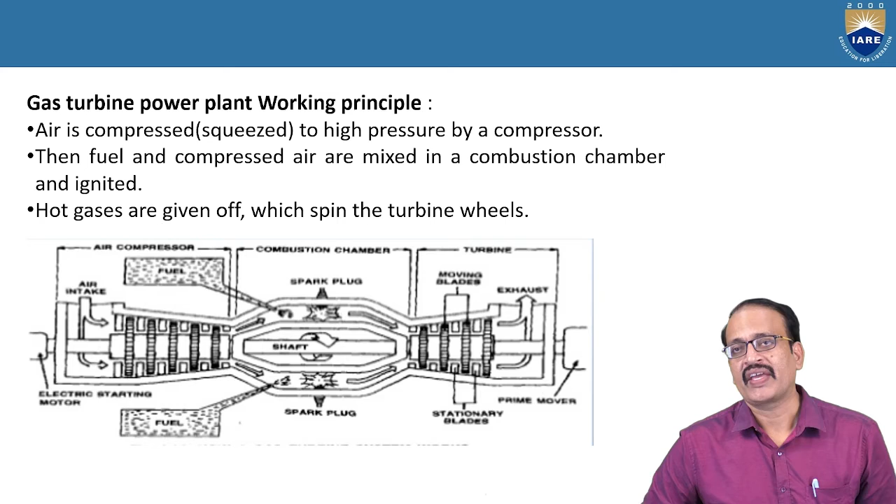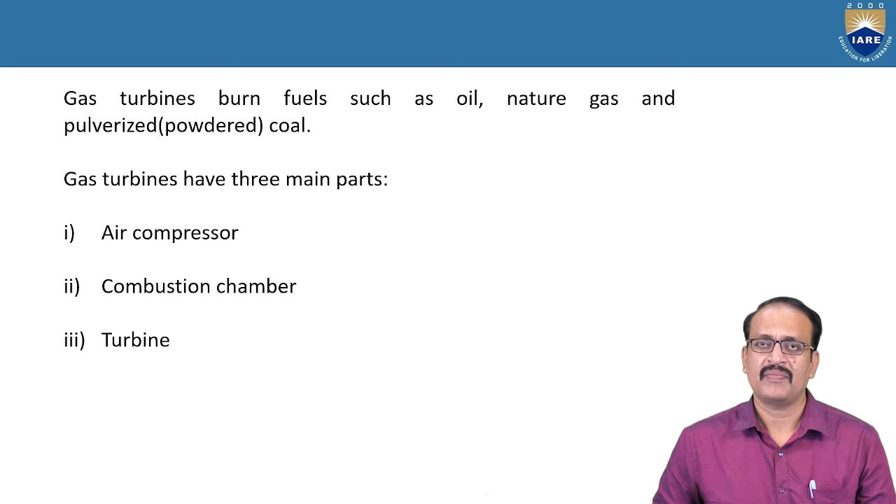After compression, the compressed air moves into the chamber. There we supply fuel and burn it, and high pressure gases are released because of that burning, and they move. While moving, they have so much kinetic energy. They rotate the turbine and then go away through the exhaust. So the main parts are the air compressor, combustion chamber, and the turbine.

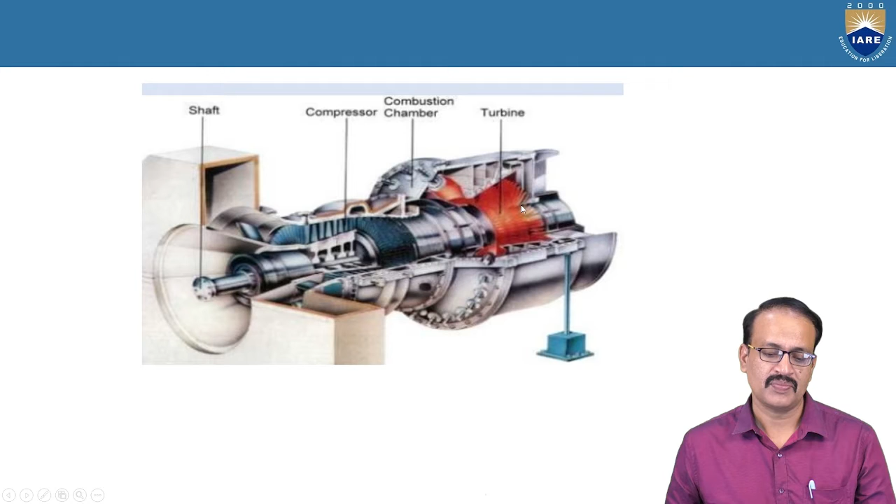You can observe here, there is a shaft - the compressor, combustion chamber, and turbine. So the duty of the air compressor is to suck the air and send the compressed air into the combustion chamber. For that, we use the motor for rotating that compressor.

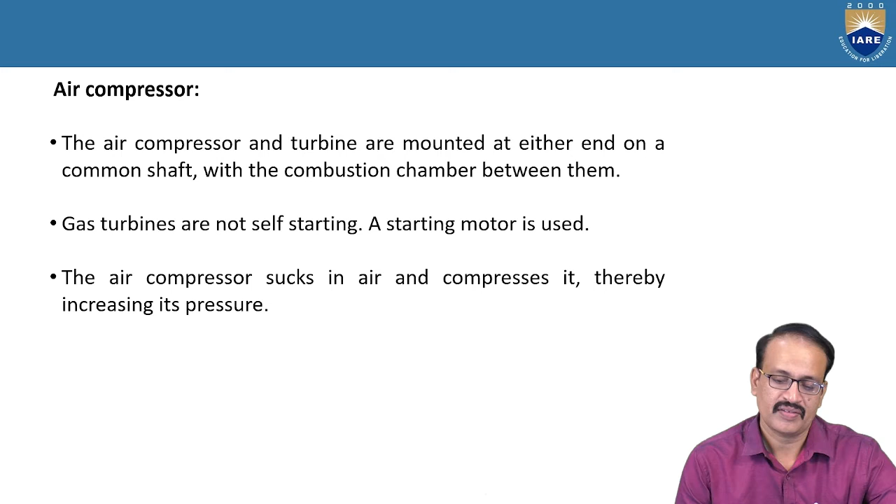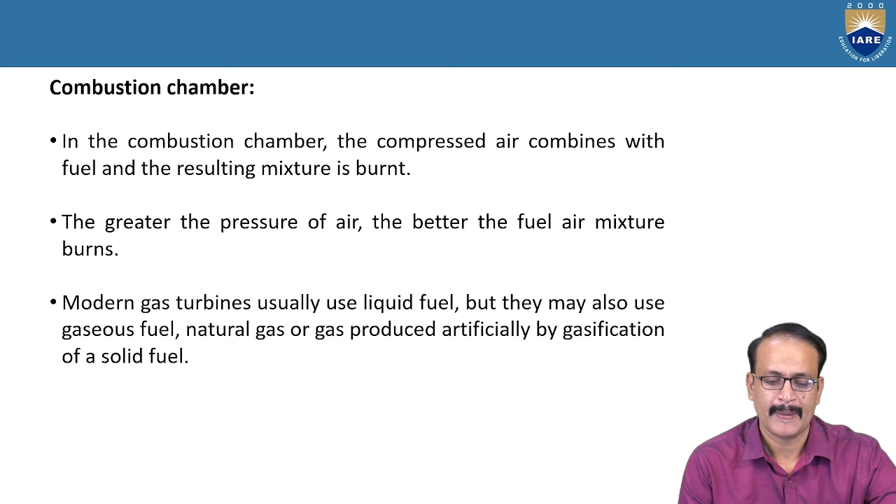So what happens in the combustion chamber? The compressed air mixes with the fuel and we burn it. So much of gases are released with high velocity because of that burning. Next is the turbine, a multi-stage turbine, where we can properly use the velocity of those gases.

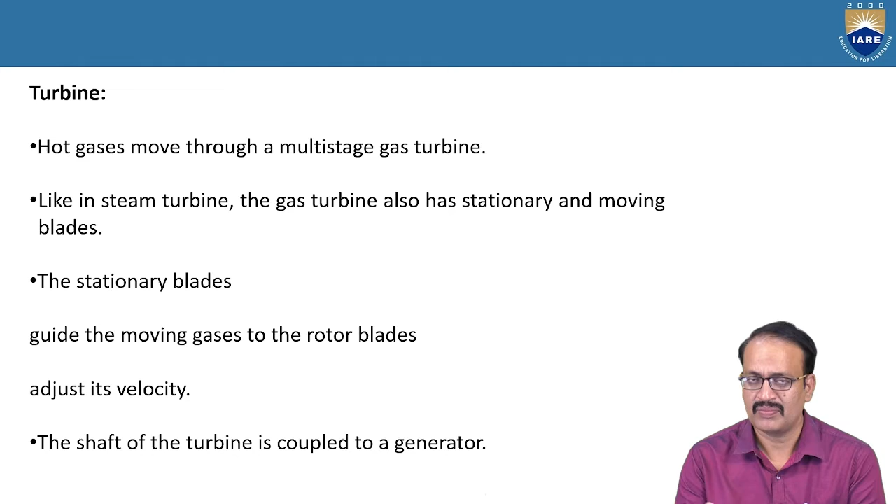It will have blades, rotor and shaft, which is going to couple with the generator. Normally the turbine will be coupled with the generator.

So what are the applications? We can use them to drive pumps. Majority we are using the gas turbines - in fact, the gas turbines we use for power generation is less compared to the gas turbines used for aircrafts, for moving aeroplanes and ships, and also we use them in high speed cars.

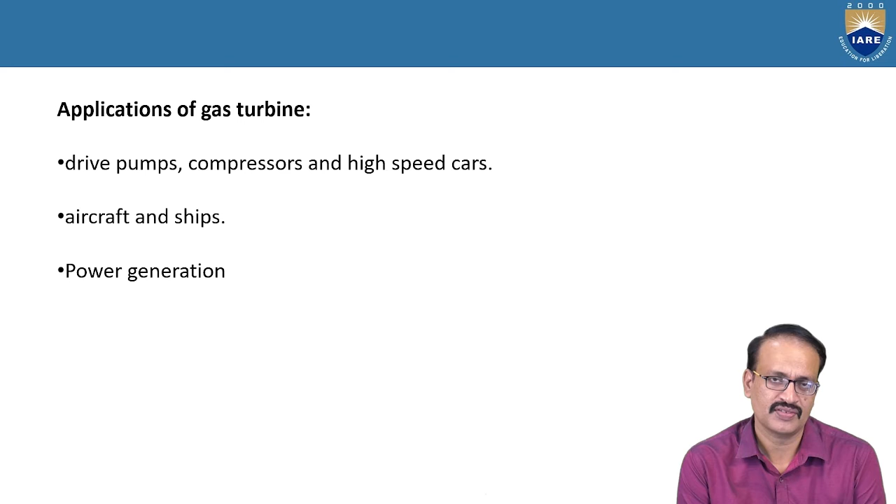So this gas turbine is a very simple thing, and also it is very robust. It is also cheap - the construction and installation cost is very less. So it has its own advantages, so many advantages.

And if you see the advantages, because it is simple, the operation is also simple, and the construction is also simple. So it is cheap, the manufacturing is cheap. Since the operation is simple, the maintenance cost is less. And also here there is no need for storage of fuel. And there is no need for boiler, condenser, other accessories as for the steam turbines - those things are not needed here.

So the installation cost is very less. So we can use cheap fuels like kerosene, powdered coal, benzene, paraffin - we can use cheaper fuels than petrol and diesel here.

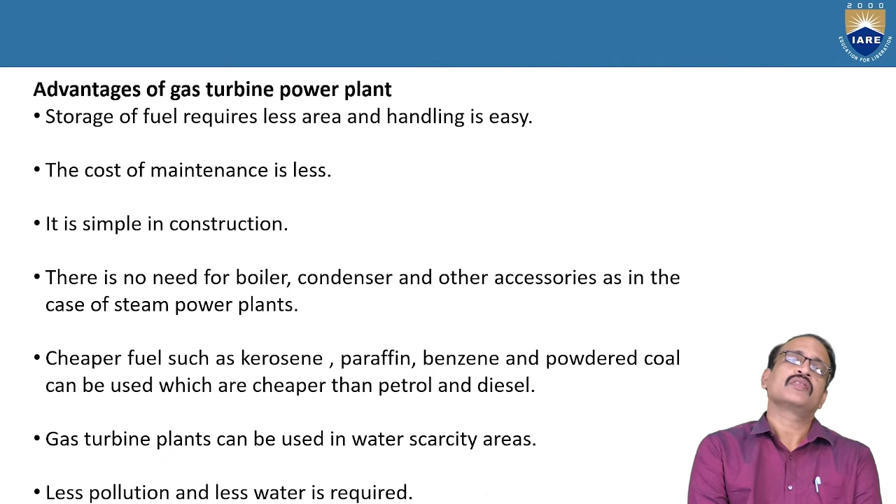So whenever, if I go to the desert, if I go to the Arab countries where water is more valuable than oil, I cannot construct a hydro plant. Even a thermal plant needs so much water for converting it into steam, for condensing, for cooling. So in such places, where there is scarcity of water, I can go for this gas turbine. And also the pollution is less.

Here the pollution is very, very less. If you compare with the steam turbines, so much of ash pollution is coming. So that problem is not there.

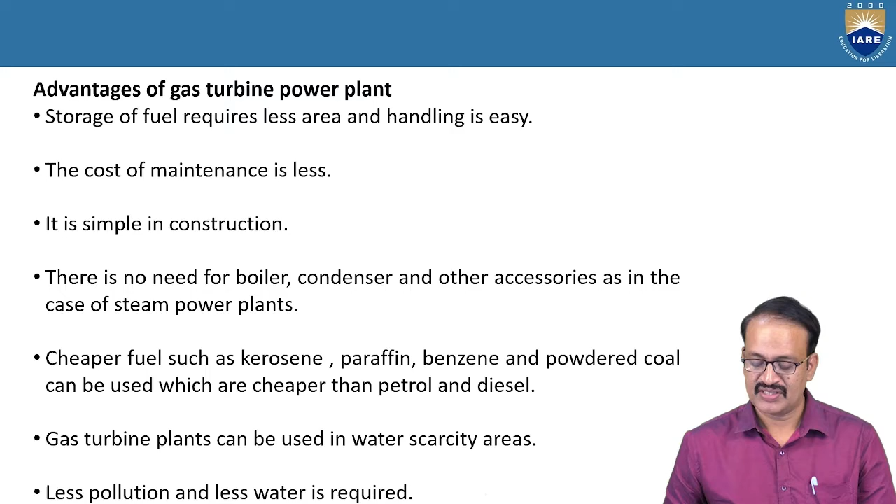But similarly, for anything we'll have disadvantages also. So the disadvantage is that, as I told you earlier, 66% of the power which is generated is used for the motor to drive the compressor. So that is the major disadvantage. So the efficiency is only up to 30%.

And also it rotates with very high speed, 40,000 to 1 lakh RPM, rotations per minute. You can imagine what the speed is - if you compare with the hydro plant, hydraulic turbines, steam turbines, there is no matching at all. And the temperature also is very high, 1100 to 12,600 degrees centigrade, so normal metals will melt, normal metals cannot withstand it. So the design has to withstand that speed, the mechanical stress, and the heat. So you require special alloys, super alloys, and a high technology for that.

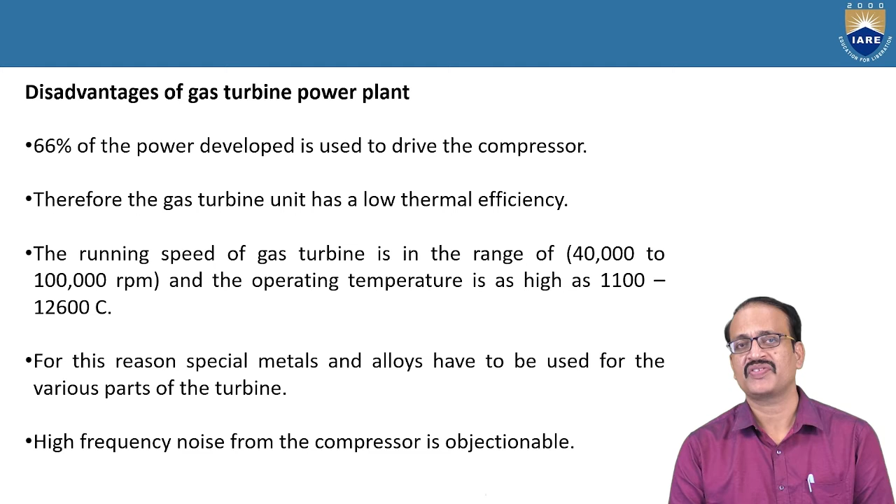So that's about the gas turbine, but we will compare. If you see, there is no matching if you compare the efficiency, if you compare the speed, if you compare the temperatures - that much speed it is going to rotate, that much high temperature it is going to operate, but the efficiency is less. But the advantage is that the installation cost and area required is less, no need for boilers, condensers, cooling towers, all these things.

Okay, we will see a small comparison here. So we know that gas turbines are mainly used in aeroplanes, technically we can say aviation. So in both cases we are going to use the gas turbines.

So in aviation, the main aim is that we have to produce thrust, and in land gas turbines, meaning the turbines we use to generate power, the main thing is it has to produce more mechanical energy. Here the requirement is mechanical energy, there the requirement is thrust force. And the end component for aviation is the nozzle.

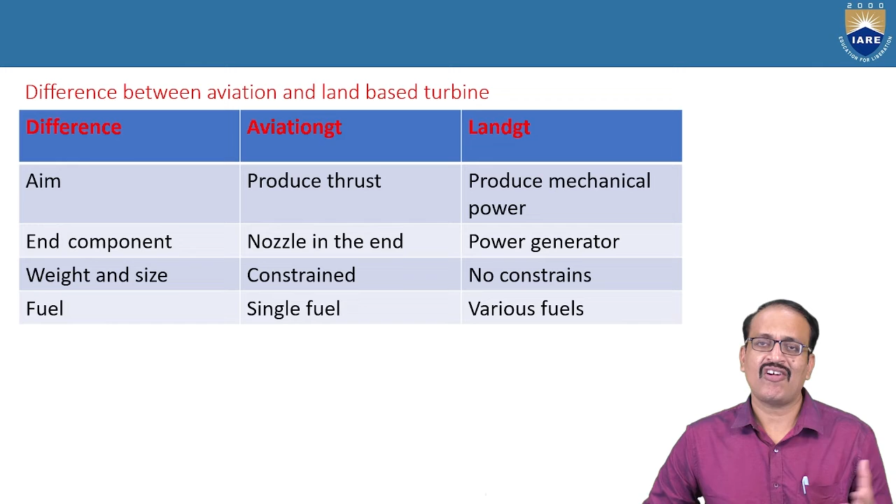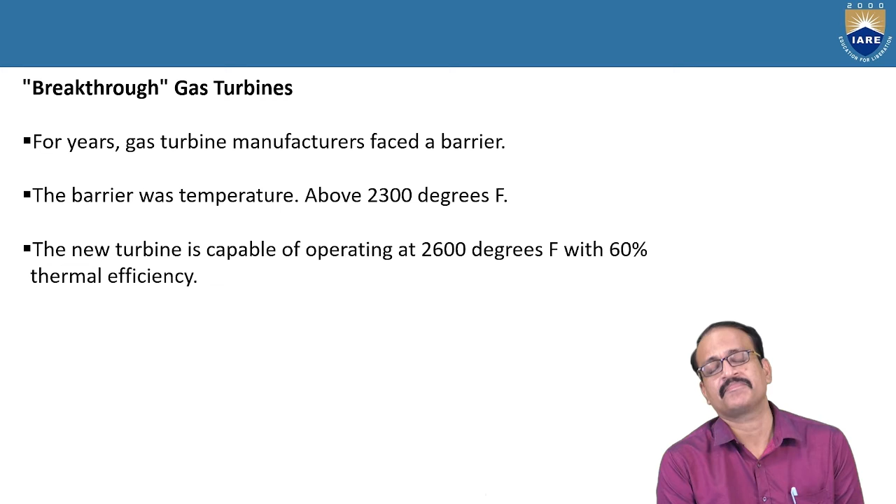And as I told, there was a breakthrough in the year 2000. They were able to make a gas turbine which can withstand high temperature, from 2300 degrees Fahrenheit to 2600 degrees Fahrenheit, with 60% thermal efficiency. So that is a good breakthrough which has happened.

And we were always comparing - yes, we have to compare. Since there also we are using thermal energy, here also we are using thermal energy, so we need to compare this gas turbine with the steam turbine. The gas turbine is not going to depend on water availability. But if you go to the steam turbine, yes, it requires so much water, because the water is what we are going to use as the force - we are going to convert it into steam.

So for the gas turbine, the space for installation is less, and for the steam turbine, the space for installation is high. The efficiency of the gas turbine is less, the cost is also less, installation cost is also less, maintenance cost is also less, but the efficiency is also less. But for the steam turbine, the efficiency is high.

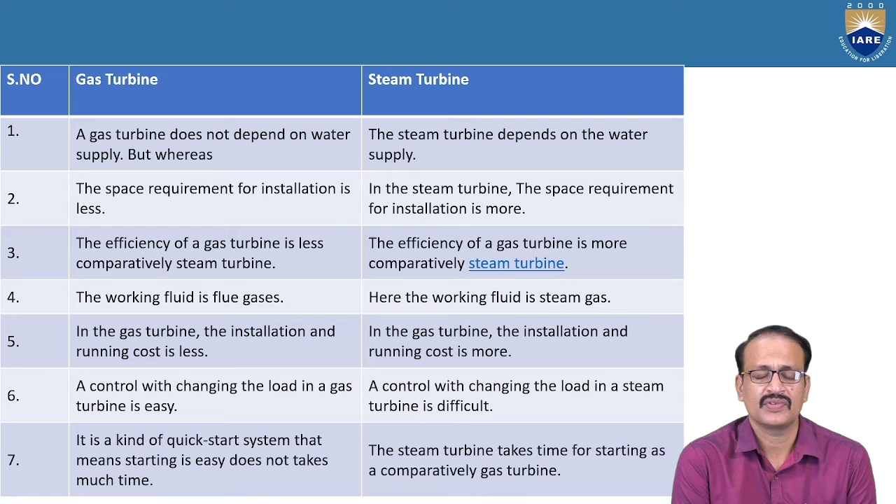If you want, it is possible in the gas turbines, but it is not possible with that much speed in the steam turbines. It is not possible in the steam turbines.

So that's why we can say the gas turbine we can use in areas where the fuel is cheap and readily available, and the land is less and water sources are less. In such cases, you can go for a gas turbine.

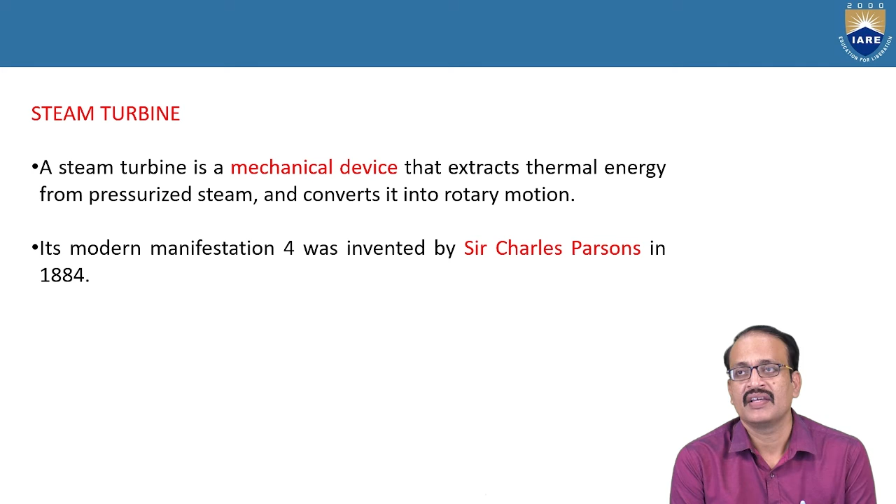And if you come to the steam turbine, yes, it is a device which will produce mechanical force. It was invented by Sir Charles Parsons in 1884. The steam turbine was invented by Charles Parsons in 1884.

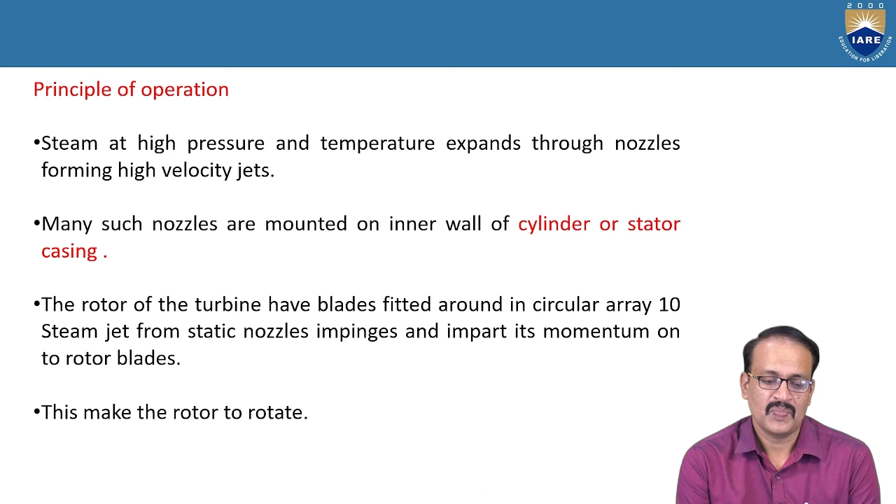The principle is that it is going to expand the steam on the blades with high pressure and temperature. It is going to come out of the nozzles, forming a high velocity and expanding on the blades, and that force is going to rotate the rotor.

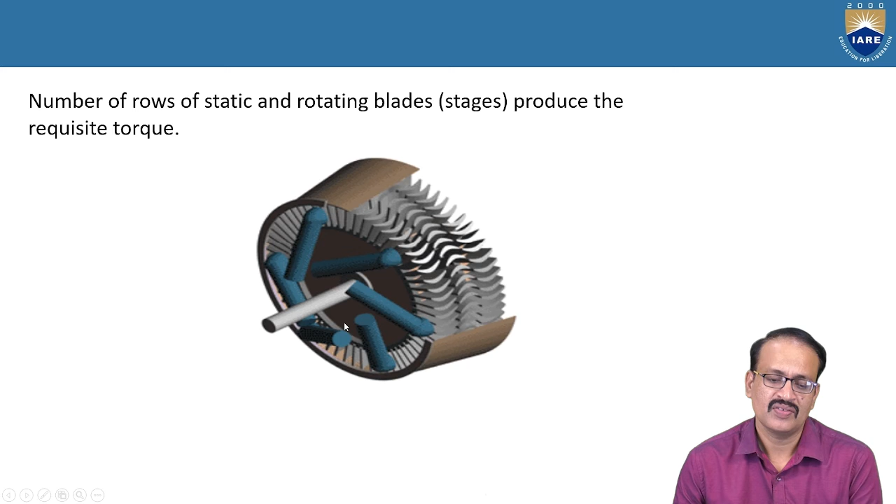Here you can observe the nozzles. From there, the steam is going to come out with high pressure and velocity, and it will fall on the blades, and the blades will move. They are going to expand.

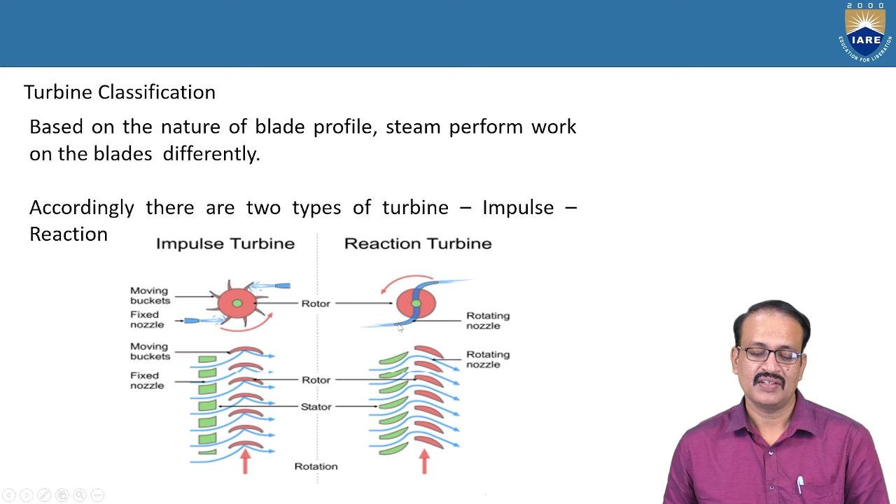So here also there are two types, that is impulse and reaction. You can observe: the steam is directly falling on the blades here, creating the rotational force in the impulse type. That's why it is called impulse. Here it is reaction - the steam is going to move inside an S type of nozzle, creating the velocity. So it is the reaction, that's why it is called reaction.

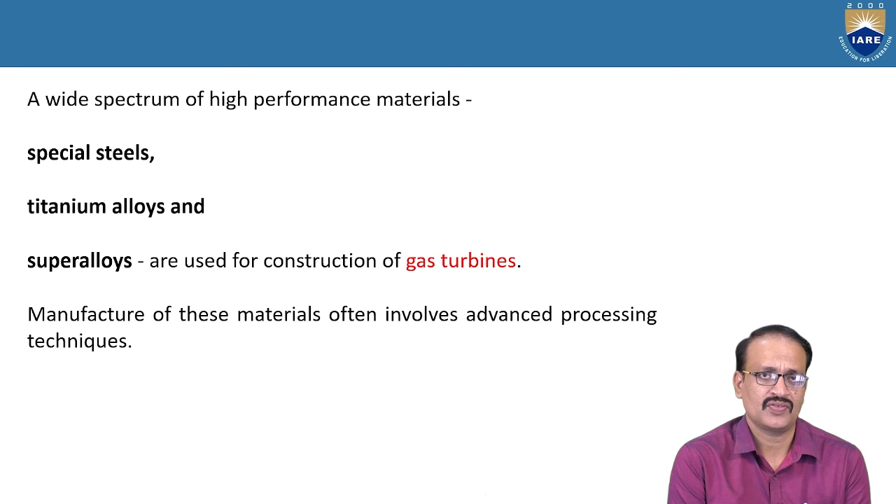As I have already told you, the making of a gas turbine is very, very difficult, because we have to deal with very high temperatures and high speeds. So there we are going to use special steels, titanium alloys, and super alloys. This requires very advanced technology.

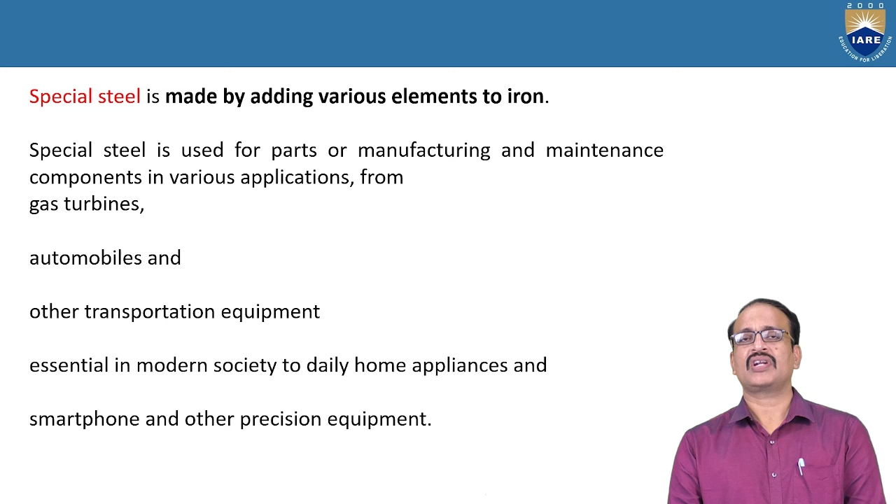So the special steel is made by adding various elements to iron. So steel is an alloy of iron. It is used in gas turbines, automobiles, and all these things.

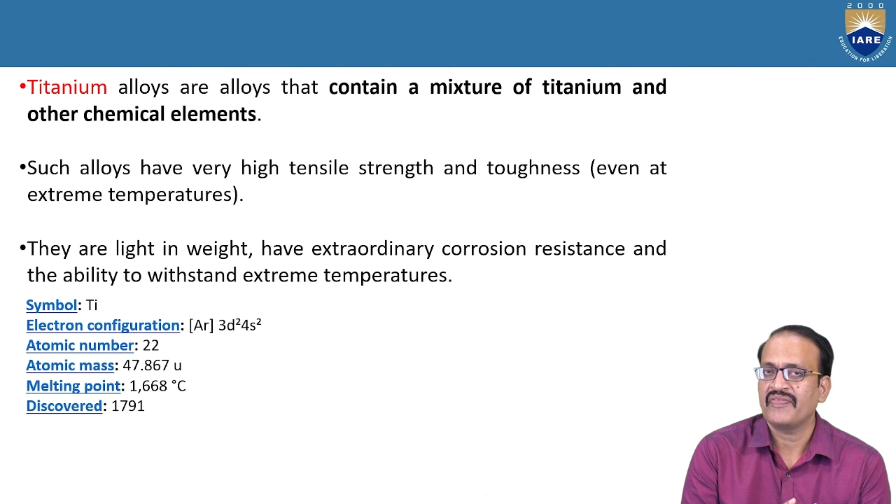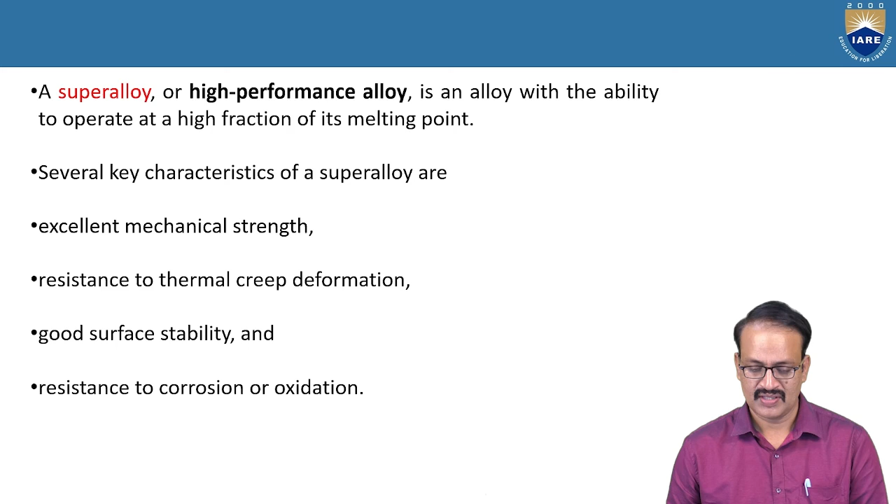And there is a small difference between corrosion and oxidation. The corrosion is going to happen to metals, especially for metals. Oxidation is going to happen anywhere.

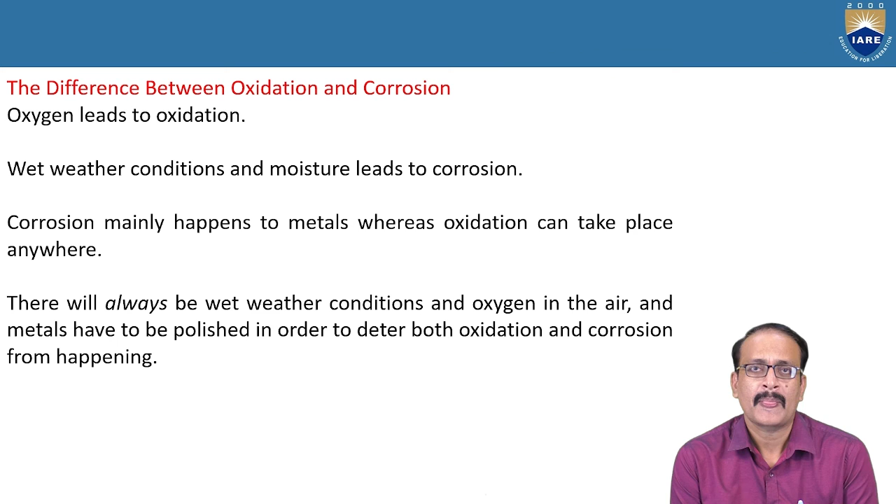Presently we are using a very good alloy, which is called CRMOV alloy, a low alloy steel - with 1% chromium, 1% molybdenum, and 0.25% vanadium, up to 0.3% carbon, the balance iron, and possibly a small addition of silicon. So these are the types of alloys we are going to use.